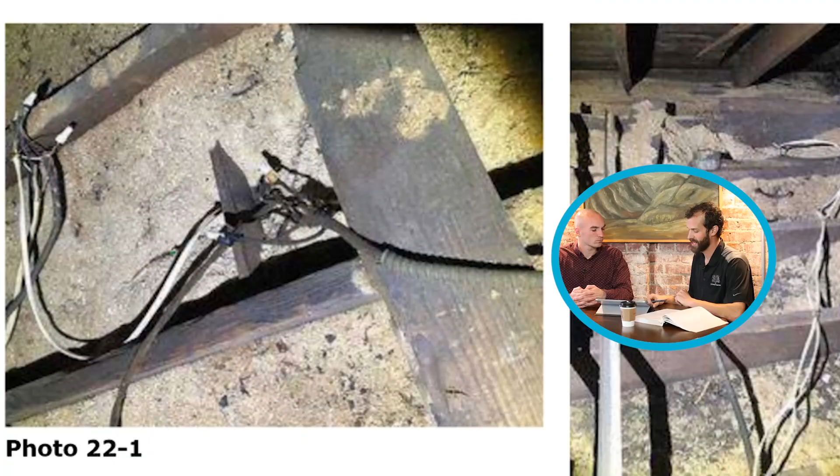Well, I'm impressed that you and Liz undertook tackling a project of this extent as new homeowners. I think it's fair to say 95% of people who had walked through that house would have run away terrified, given the heavy lift that was entailed in this project. So let's do our best to walk through photo by photo in a systematic fashion, looking at each of these violations and talking through the codes around them.

So photo number 22-1, we've got 2 open splices here in the attic. You'll see from this photo a couple things. One, the attic insulation is real minimal, so this is not going to be the final equation as far as the attic conditions at the end of this rehab project.

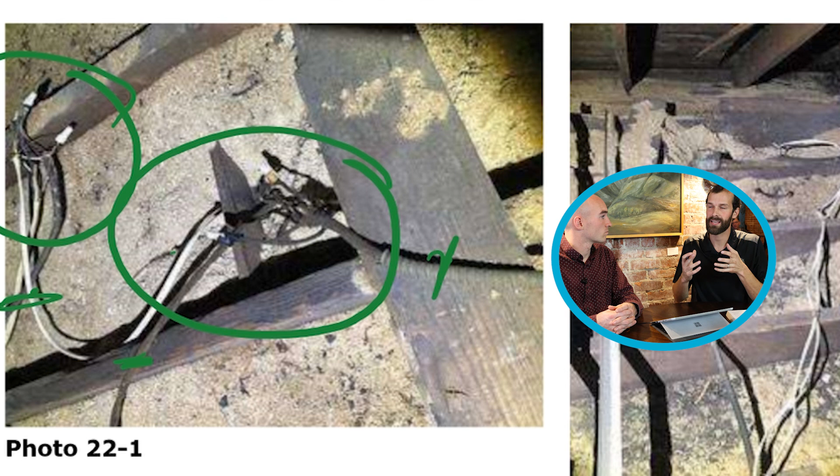But the junction boxes that are meant to contain and house these electrical connections are entirely absent. It's just a wire nut to wire nut connection. And in addition to that, there's no securement on the incoming wires in any way, shape, or form. So these junctions, really the safety concern here is manifold in this situation.

Safety concern number 1 is the junction is not properly contained or enclosed. So if there's a failure on these electrical junctions, that heat or fire incident is not going to be contained. It's going to be exposed to the nearest combustible framing members, wood framing members right here. That splice is literally resting on combustible material. So we've got an optimal situation for a major heat incident.

Second, those connections are not in any way protected from future attic insulation or from accidental incident. Obviously an attic is going to be traversed periodically for different types of service purposes and things of that nature.

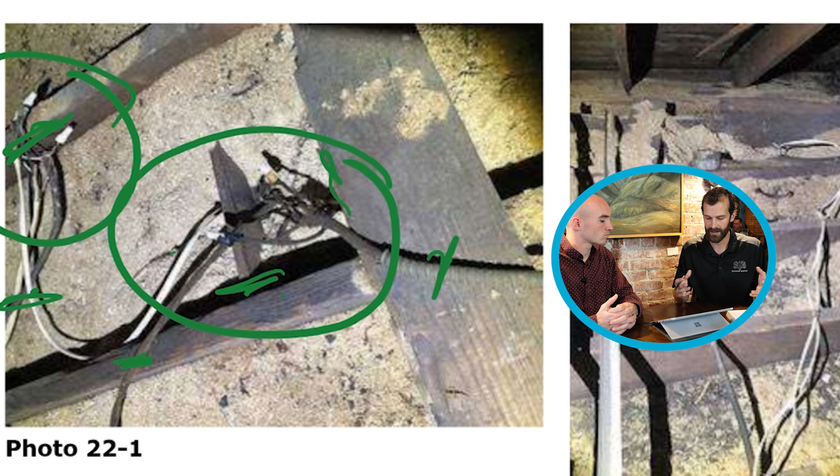And the third, from a personnel standpoint, personnel are not protected from the risk of shock hazard suitably. The interior conductors are exposed. The insulation on those conductors is lightweight, meant to be contained inside of some type of electrical enclosure. If one of those wire nuts comes off, there's no secondary protection, so the risk of shock to personnel is substantially increased.

And you said that BX wire is externally grounded, right? So is that the most dangerous in this scenario, or are certain wire types more dangerous than others? I know knob and tube's like a thing. The thing. And your house had plenty of knob and tube. Oh, it's not depicted in this photo here, but yeah, good point.

So wire types real quick, and the grounding and bonding and continuity, both mechanical and electrical, associated with them. This white conductor here is Romex, what you buy off the shelf today at a home supply or electrical supply store. This right here is early generation non-metallic cable, which we call 'snakeskin' affectionately. It almost looks like the skin of a snake, and the outer jacket will peel off and literally look like a snake shed its skin in the attic.

And then this one over here, this is BX cable. To your point, the outer jacket is the grounding path. So we have a grounded cable in our non-metallic cable, an ungrounded cable in our snakeskin, and a grounding path which is not being utilized in our BX cable. In this situation, a metallic junction box would be required in order to connect and ground, with a proper fitting, the jacket and the grounding conductor on the non-metallic cable.

So that we're now electrically and mechanically continuous as far as the ground path. Ground path is required to be continued through every junction box. It's actually pretty typical in an older home like yours, anything built from the late 1800s all the way through the 1940s, to find 4 types of wiring: BX, snakeskin, Romex, and knob and tube. So your house is pretty par for the course in that respect, and it was due for some major updates.

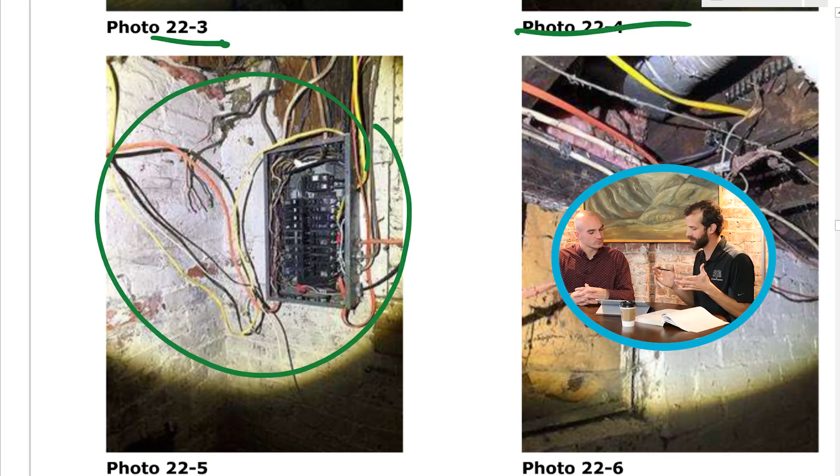Non-metallic wiring types like this Romex are required to be secured within every 4.5 feet and within 12 inches of every termination. Your house actually got hit with not just poor workmanship over a long period of time in a transitional neighborhood, but also a wiring theft.

At some point, someone broke into this house and stripped elements of both the electrical and plumbing system and looted the copper. There's been substantial efforts in the last 4 to 5 years to really crack down on scrapping copper. An electrical license or an HVAC license plus property addresses are required to prevent this type of looting to a property.

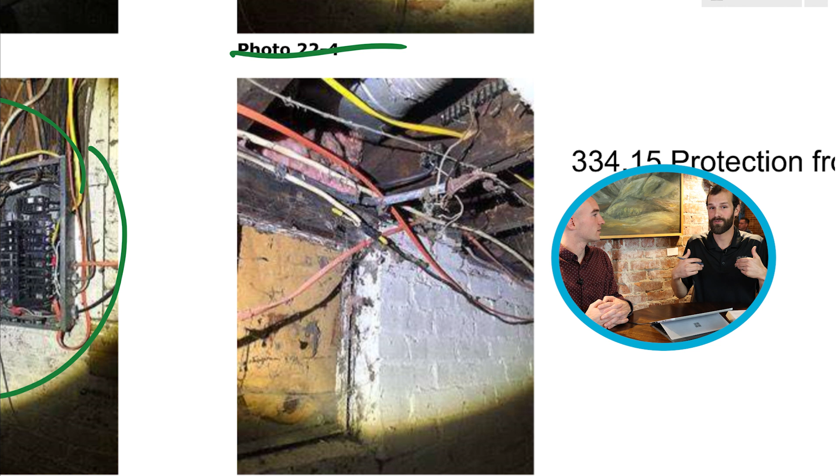So that's really dramatically decreased the number of even occupied dwellings that we respond to, where somebody goes on vacation or there's a tenant transition and the for rent sign goes out in the front yard, the house is unoccupied. And we're actually responding on a pretty regular basis to houses that have been stripped of their wiring in the basement.

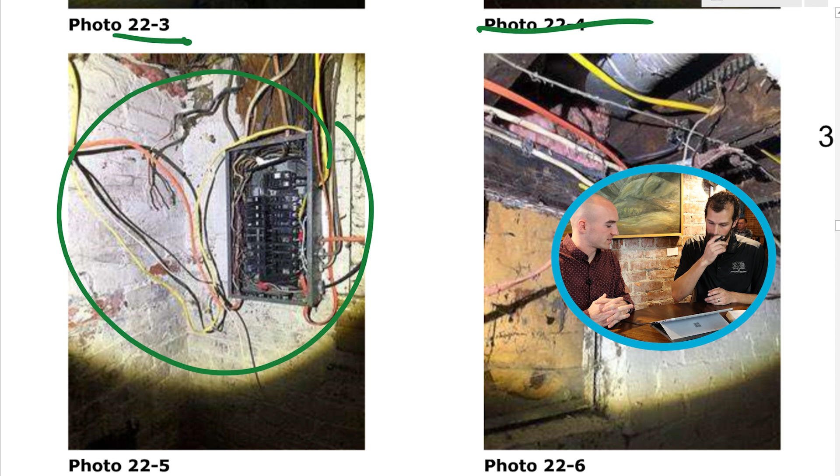Probably $50 to $150 of scrap copper and $3,000 to $4,000 worth of wiring repairs to make that house livable again. And just revisiting this, how do you see that? Is it because of the new Romex that you see mixed in there? Yeah, that's a good question. Or just cuts? That's a great question. That's actually going to be real evident in a later photo here.

More evidence of poor workmanship, wiring not being secured to and closely following the building finish and surface. This one right here, we had a small amount of wiring that was actually properly run through the joist cavity, drilled holes. Unfortunately, when less than 15 to 20% of the building wiring is in good shape like this, it is difficult to reuse because it's spliced, especially when you have floor plan changes. It's no longer going to the right destination. That outlet has now been relocated with a wall that's been removed, a kitchen that's been redesigned, relaid out.

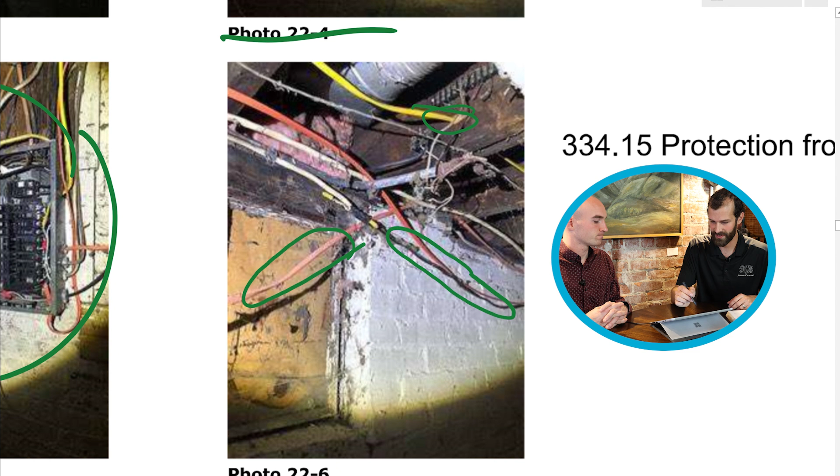So there really wasn't much usable wiring, even though there was some current wiring. So our collective decision was to go the direction of a whole house rewire, because there's very little salvageable, undamaged wiring in the house at all.

Got some more views here on the tragedy going on in the basement, wiring tragedy, and you'll see that the wiring here has been cut. Why all of it wasn't taken, no idea.

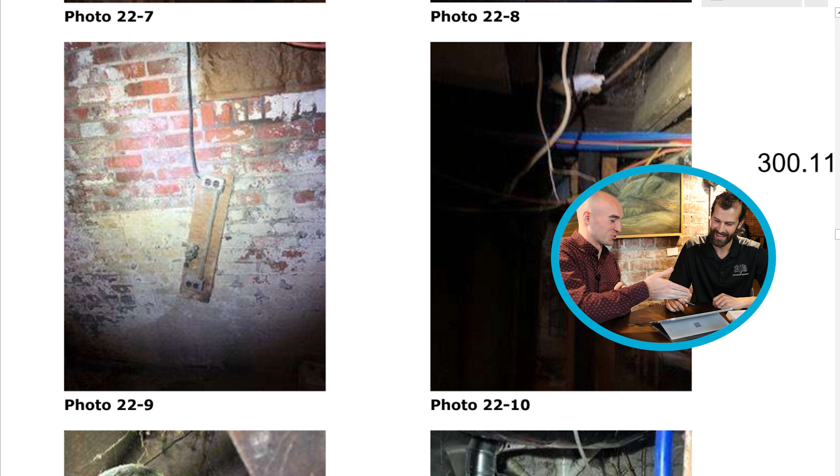This is a beauty right here. Yeah, it just looks wrong. So a couple things going on here. One, we don't have protection from physical damage. When the wiring drops down the basement wall, like usually in the overhead cavity, non-metallic exposed wiring is going to be permitted by most jurisdictions. But when it drops down the basement wall, it does need to be secured and supported.

Our typical approach would be to put that in a PVC conduit when it's on an exterior wall specifically. That PVC is going to weather a lot better on an exterior wall than electrical metallic tubing, for instance, which is going to have evidence of corrosion slowly over time.

So it's not secured, it's not protected. We are missing GFCI protection and wet location on the basement outlets. There's no contention about an unfinished basement being, by code definition and interpretation, a wet location. And so ground fault circuit interrupter protection would be required.

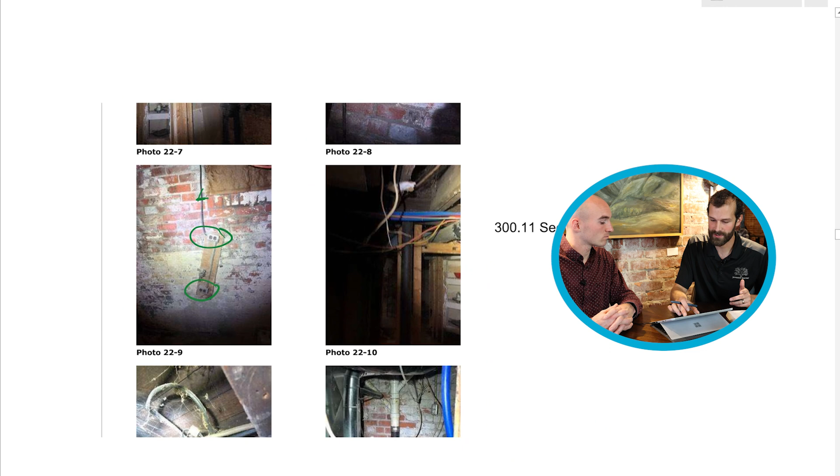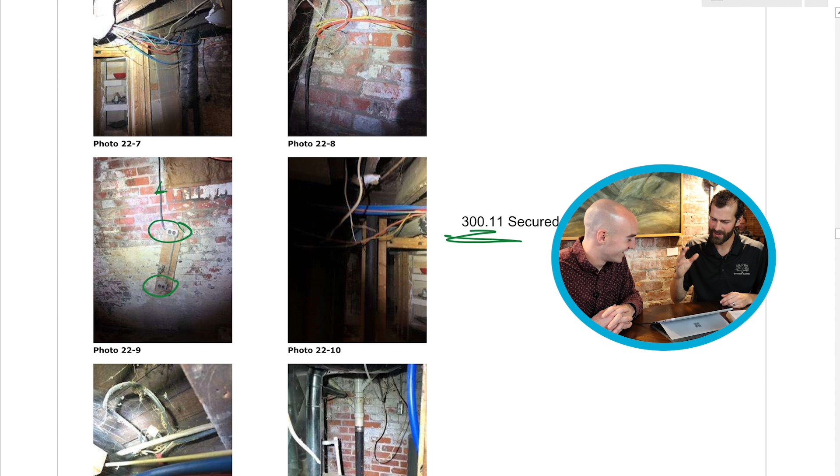And then also, receptacles are required to be secured in place, 300.11, secured in place, affixed, fastened rigidly and solidly to the building structure, and not to, you can't slap that onto a water heater or a furnace, it's got to be the structure of the building itself. And not to a random chunk of plywood that is hanging by the wiring.

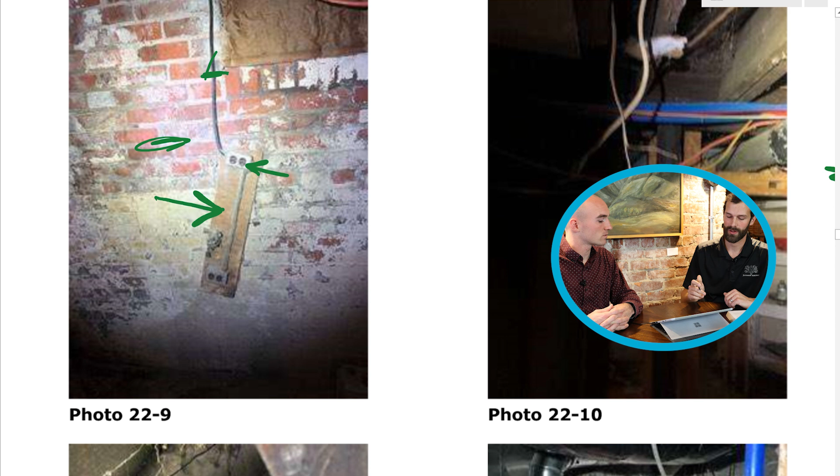Got it. Right, and this is one thing that inspectors will actually fairly routinely require, is some kind of vapor gap between ferrous metals, like we see here. This is a steel junction box, that's a ferrous metal, and a damp surface or wet surface. My contention with plywood is that it has an unsuitable lifespan for the installation that's present.

And so electrical boxes often will be equipped with bump outs, quarter inch bump outs. That creates an air gap on the back of the electrical box. So that's something to look for if you're planning an installation.

If you've got an electrical box like this, a steel handy box that's really got no weatherproofing capabilities, and it doesn't have those quarter inch bump outs, or an enameled surface, or a PVC coating, or something of that nature, it's not rated for your basement walls. It's going to corrode, and you're going to have a moisture condition inside of your electrical box. That's our lean towards PVC in that circumstance.

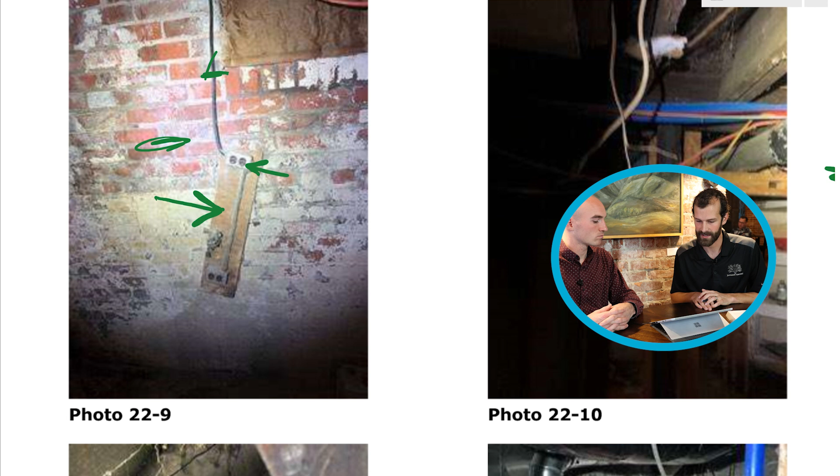More evidence of what's taking place here. All right, we've got a little beautiful knob and tube going on here, there it is. Gorgeous, more open splicing, beautiful.

All this other down here is PEX. We've got cold water lines, hot water lines. That's a 10-3 Romex cable traveling to, I think, what was the dryer location. Yeah, that's been rerouted as well.

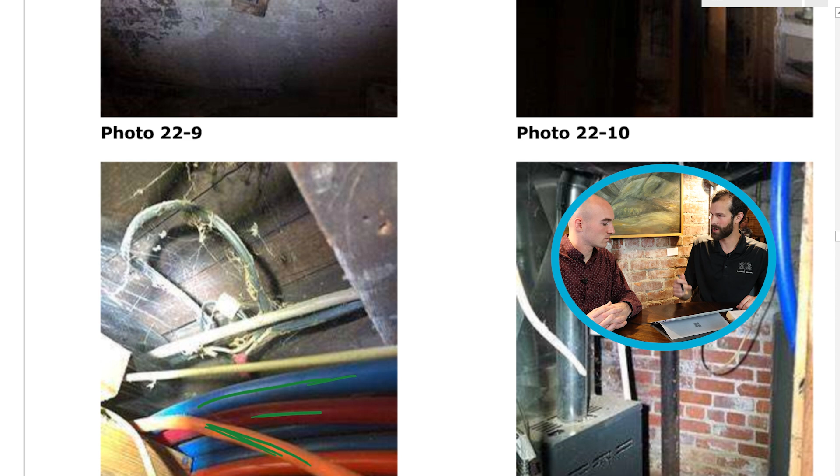You'll see a lack of GFCI protection. This one actually has been protected. That cable is in an EMT conduit, and that's, I believe, an interior brick wall, is that correct? Yep, so that would be one application where that interior wall really shouldn't see much moisture at all.

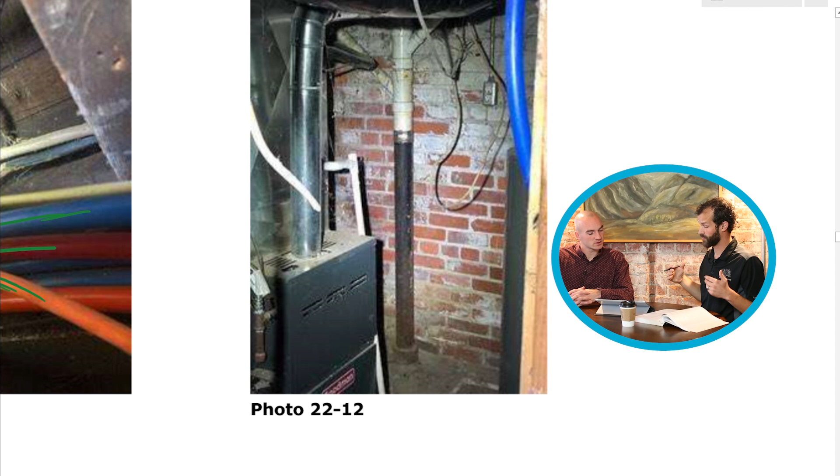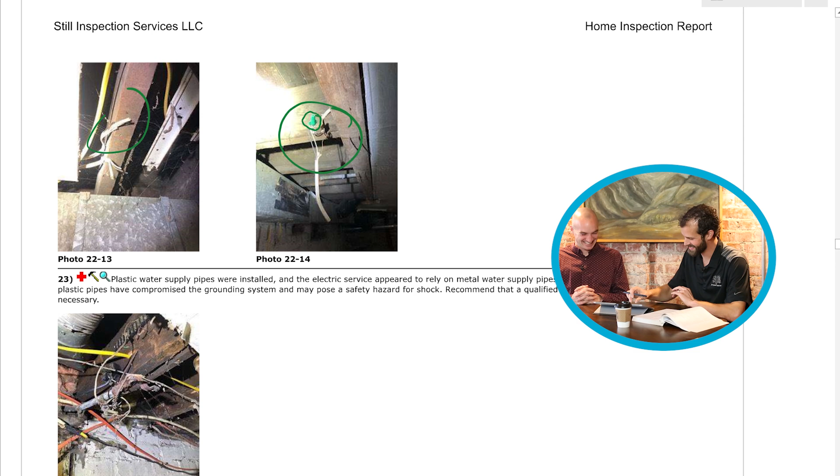So we've got more beauty shots here. Stripped wire. I love the fact in this photo that they've got a really nice green grounding wire added to continue the grounding path for this absolutely horrendous installation. It's hysterical.

And also, in previous videos, you've talked about water or gas lines being near anything. Ventilation, like those are vents there. They're metal. Does that need any consideration at all?

Yeah, at least two considerations. The first is that metal ducting presents sharp metal edges, and non-metallic wiring has to be run in a manner in which it's protected from damage and abrasion. It has to be installed with all considerations for protection to the physical jacket itself, and during installation thereafter, you want to make sure it's not at risk of harm.

And secondarily, wiring can be run around the ducting and there's no proximity limitation, but it cannot be run through the ducting. Sometimes, particularly in a wall cavity, the cavity is the duct way itself, and it's tempting to just cut right through there to take the shortest path. If there's a fire event at the house and the jacket is inside the airway system, the furnace is probably still going to be running and distributing toxic fumes throughout the entire house, creating a more hazardous situation.

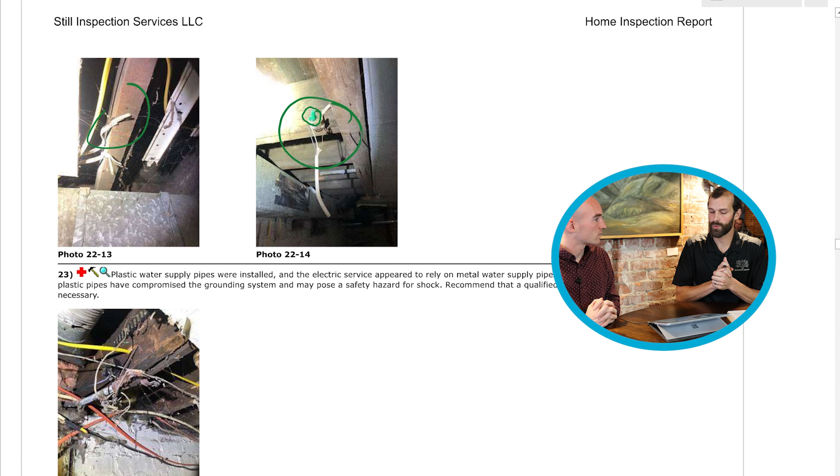So you said just when it's in flames or when it's hot? Like if a wire's touching the vent, is that a problem? No, the jacket's going to have sufficient rating for the temperature. It's only if it's actually failing, cooking, roasting.

Okay, all right, here we're into the main electrical panel. There's a bunch going on in here, this is busy. Photo number 1 here, 24-1. The code violation I'd like to illuminate is the double tapping of this breaker. We've got 2 hot or ungrounded conductors coming into one terminal.

And the question around that is the terminal—everything electrical has to be used according to the listing and labeling. What is listing? Listing is literally a list of products that have been tested and certified by a listing laboratory, like Underwriters Laboratories, most famous listing laboratory this side of the Suez Canal. UL, right? UL, okay, that's it.

You've seen the mark on everything you purchase, right? They're all over the place. So this breaker was not listed and tested to have 2 conductors coming into a terminal designed for 1 conductor. That creates a conflict, an inherent code conflict, and the reference there is 110.3(b). That's one of the most ubiquitous codes because it just means everything—everything has to be not only installed properly, but also used properly.

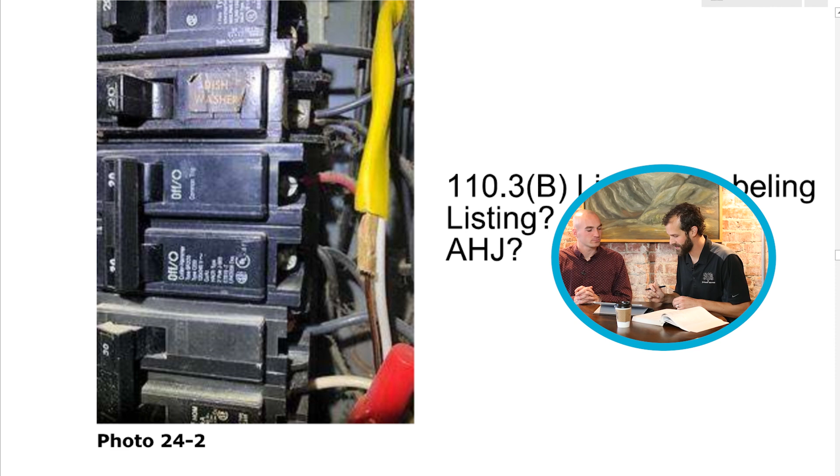That's what that is. So are there any breakers that are supposed to have double tapped wires? Yeah, those breakers do exist, but they're not these. In this photo we've got a smorgasbord of Siemens breakers, a dishwasher breaker of unknown brand probably not compatible with this, a Cutler Hammer, and I think a Square D Homeline at the bottom.

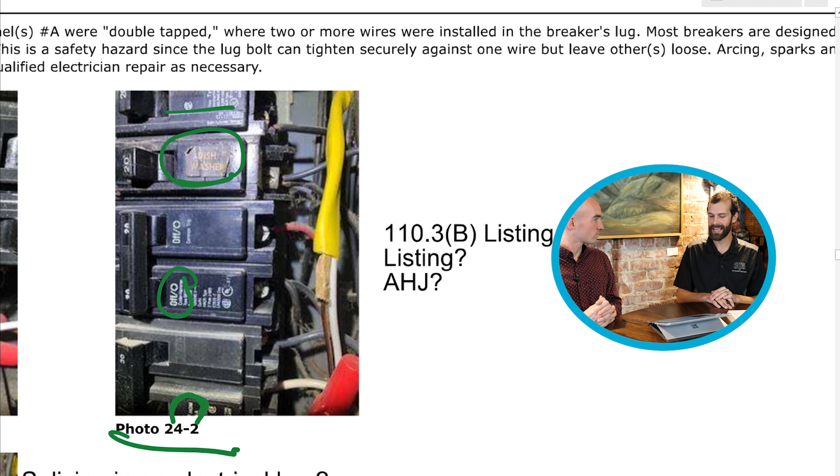And I guarantee you that this old breaker panel was not listed and labeled to be compatible with these 4 different breaker types. So we've got an inherent code violation there. It would take a little bit of research to prove it beyond the shadow of a doubt, but it's a 99% chance that's an existing issue.

All right, this one right here, this outer jacket inside of the box. I think it's a little bit difficult, this might be contentious with some of you electricians out there. I think it's a little bit difficult to argue that that's a code violation. The code does state there's a minimum when you've got an overall outer jacket on a multi-conductor cable like this. It's a 3-conductor cable. We've got a neutral, a ground, and I don't actually see where the hot is going.

When you've got a 3-conductor cable, minimum 1/4 inch of the outer jacket inside the clamp and the electrical box. That's so we're clamped on the outer jacket, and that provides a protective layer to the inner, more susceptible cables. But it's a little bit hard to argue, in my opinion, that an excessive amount of jacket is technically a code violation. I would wholeheartedly agree it's a violation of best practice, because that becomes really cumbersome. That outer jacket is not nearly as workable. It takes up more physical space in what's already a tight environment where you're looking for every inch you can find. So most definitely a violation of best practices.

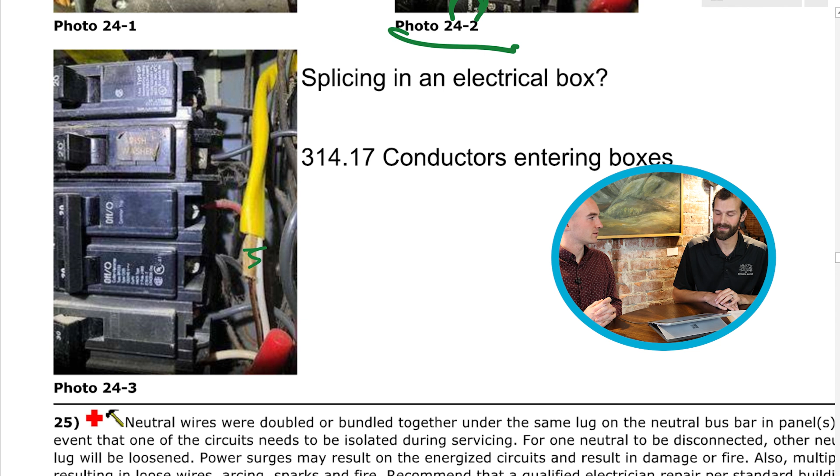Can I ask a nitpicky question there? That little paper within the jacket, is that flammable or no? I've noticed it before. It is waxed paper. Is it flammable? Maybe one of you can answer that question in the comments below. I'm gonna say it has some fire resistant properties, but help me out.

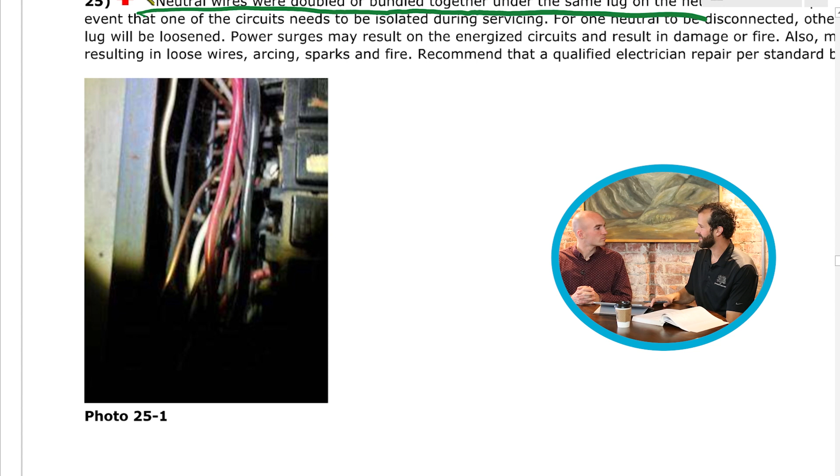All right, in this photo you really can't see it, but neutral wires were doubled or bundled together under the same lug. It comes back to 110.3B. Those terminals on the neutral bar were not rated for more than one neutral conductor.

There's a lot of sensibility in this for those of us who can be tempted from time to time to take a shortcut. What can happen is, particularly, let's say you've got a situation where you've got a number 14 stranded neutral, lots of very small, fine conductors, and you've got a number 10 gauge solid. I'm straw manning the argument a little bit here. But they're both copper, they're both neutrals, but very different proportions. When that terminal tightens down on 2 dissimilar conductors, you bet your bottom dollar it's going to snug up pretty well to that number 10 gauge neutral conductor, and that 14 gauge, a couple of those strands might be grabbed, might be holding on, but you're not going to have a solid, full capacity electrical connection.

So what can take place is you can have heating right there at that point where that smaller neutral conductor is really not getting its full capacity. If that circuit's lightly loaded, the issue's probably never going to become evident. But if that circuit's carrying a little bit more, a vacuum cleaner, a space heater, a dishwasher, a microwave, a number of different high draw appliances, then that draw is gonna rat out the weakness, and you're gonna have a loose neutral issue. And we all know what loose neutrals can do. You can literally have arc flash, dramatic electrical failure involving smoke and fire. A loose neutral is about the worst situation you can have from an electrical perspective.

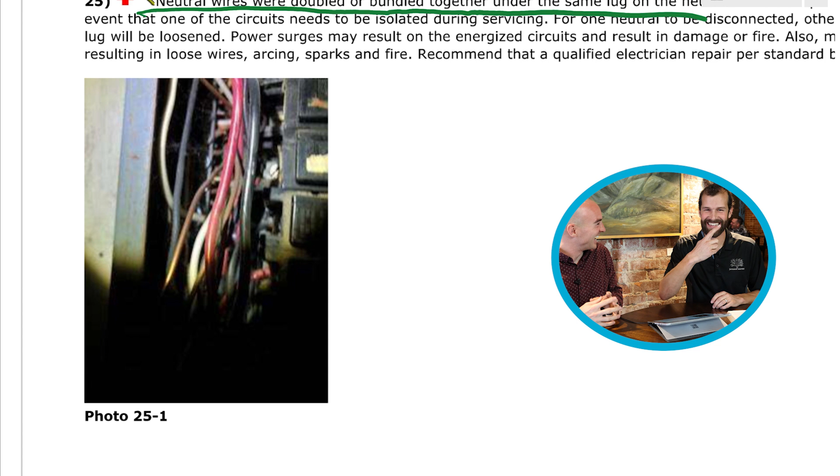So a couple thoughts for you here. One, the manufacturers typically will recommend that a breaker gets exercised - how many of us actually do this - to the off position and back on again once every 6 months. So every time you go to the dentist, exercise your breakers. Once every 6 months to make sure that internal mechanism is staying pliable.

Because of the exterior condition of this breaker and the different evidences we're seeing of exposure to moisture, that was one of the big things in this report. Lots of moisture evidence in the basement, including mold. And I would be incredibly suspect that

that breaker would perform suitably under a fault condition because of the high moisture condition. So at the very least, exercise your breakers. And in this case, we replaced the panel and all the breakers and just freshened everything up in a big way.

I'd never heard that, every 6 months. That's an easy rule of thumb. Every time you go to the dentist, exercise your breakers. That's your Google Calendar reminder.

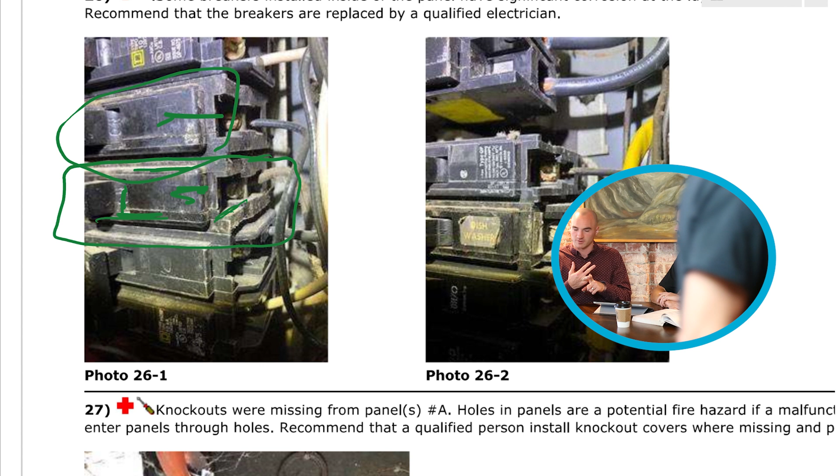could have been playing a role. Now we've got a dehumidifier running down there. We've gotten those floor drains opened up, and the next project of many will be kind of sealing up the walls, getting some probably insulation foam in there, and yeah, so all those things will be improving here, but we've replaced all these components. That's great as well.

The electrical system really is going to have the best life and provide the best service if the moisture content is between 30 and 50% humidity, and it's really consistently climatized. That's going to serve the breakers well.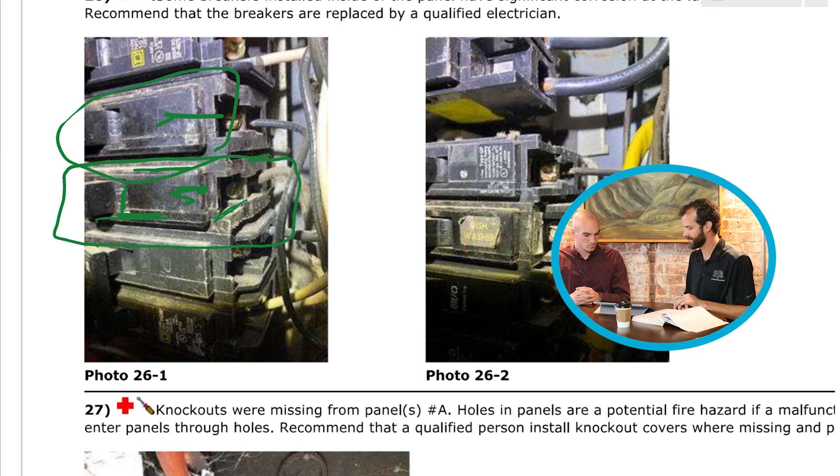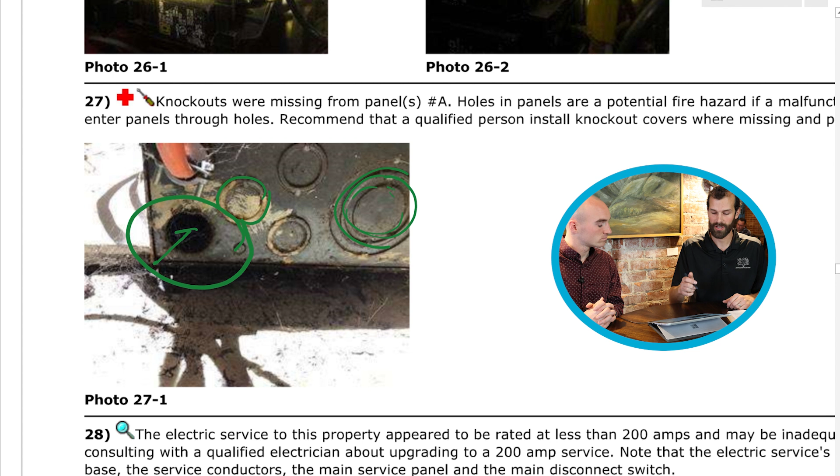All right, here we've got the bottom of the electrical panel and an open knockout, so everything's required to be fully sealed. Knockout closures for all different sizes, whether it's this 1/2 inch, 3/4 inch, and then these concentric knockouts here, 1 1/4 inch, 1.5, 2 inch, 2.5 inch. Knockout closures are designed, sold at every local hardware store for that purpose, so that it gets sealed back up.

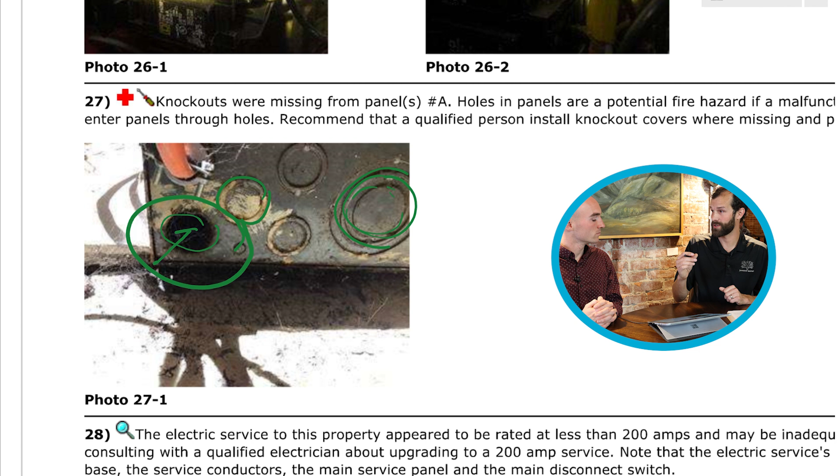It's going to prevent the infiltration of mice, rats, bugs. It's going to prevent accidental entry of something into the panel that creates a shock hazard for personnel. It's also going to continue and carry the fire rating of that enclosure. And so the knockout closure is required to be of the same material, thickness, and type as the panel itself. So you'll see that those closures are designed a little bit beefy, and we'll close that up properly.

Now here's an interesting debate right here. The electrical service to this property appears to be rated at less than 200 amps. Yes, indeed, 100 amp rated. You can tell by wire size, pipe size, meter size, that is all sized and rated to 100 amps.

A thought process around that real quick on a couple different fronts. One, from a cost equation, the cost of upgrading the electrical panel only from a dated 100 amp with evidence of corrosion to a brand new 100 amp panel, sitting in the range of anywhere from $500 to $1,500, depending on a lot of different factors.

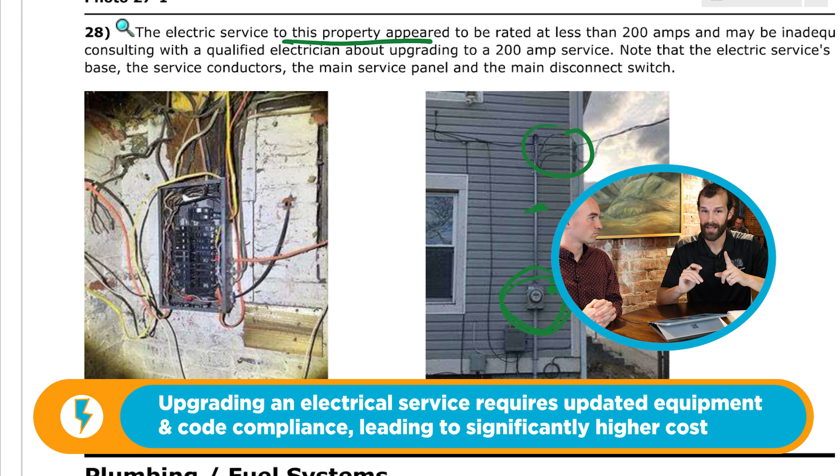The cost of upgrading the entire electrical service from 100 to 200 amps does require, and a lot of people get this confused - I hear homeowners say all the time, hey, my inspector said I've got a 100 amp meter, what would it take to get a 200 amp meter? That's actually not the question. You need a 200 amp service.

That means everything from the point of utility connection all the way through the distribution system and into the main panel, absolutely everything is required to be 200 amp rated - the size of the pipe, the size of the wire, the size of the meter. You can't just swap out the meter itself. In fact, the utility company will probably utilize the same meter. It's the whole service. So the cost of a service upgrade in full, you're looking at typically between $1,500 and $3,500. So tack on another $2,000 to that project cost.

And in this case, we've got a couple unique situations in that this gets even more involved and runs that price up, because this service is grandfathered in for the time being while it remains in its present location. But when it's upgraded, it's got to comply with the present utility standard, which is 3 feet, in the case of our utility, 3 feet to edges and corners, 3 feet to operable portions of windows.

This is not a 6-foot wall space. So this whole electrical service has to be relocated if it's upgraded. And now we're in that $3,000 to $3,500 range because we're relocating this wiring and extending its length to a totally other part of the house. And really, in your situation, Tim, that was the ideal location for that service.

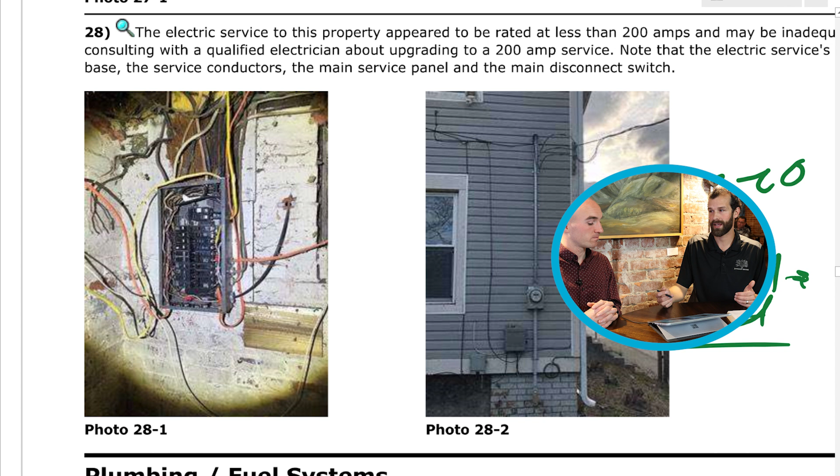Well, in your case, because you've got a detached garage, you can actually get a utility drop - separate power to the garage for the purpose of electric vehicle charging alone - and mitigate putting any of that capacity on your main electrical service. So let's say in 5 to 10 years, you and your wife, maybe less, are driving all electric. You can drop a 125 amp electrical service to the garage. You can charge 2 Teslas at the full rate without exceeding the parameters of that electrical service, and mitigate putting any of that load on the house, avoiding that expense and upgrade at that time. So there's more than one way to skin this cat.

And at this point, that's a future problem. But at least it's not a code issue, and the house is properly serviced. Super.

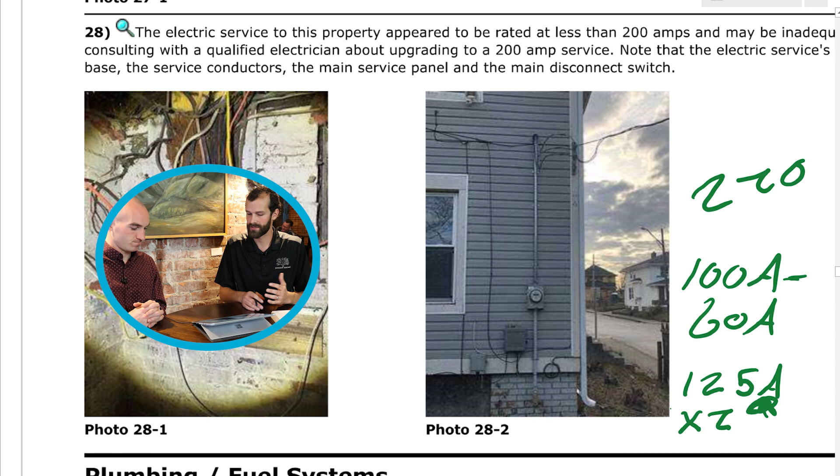Plumbing and fuel systems, not our problem.

The clamping system that you referred to here is interesting, and grounding and bonding is the single most complicated, even above and beyond service calculations, the most complicated and debated and misunderstood code article of the National Electrical Code.

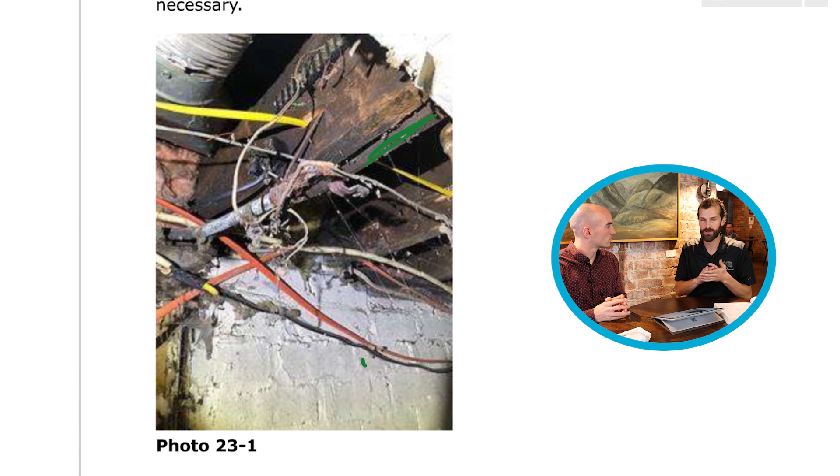It's intended, very intentionally and most importantly, to provide a safe grounding and bonding path from the gas piping system and any metallic domestic piping system, whether gas or water. I don't know what else there might be, if it would be a central vacuum system, which is typically PVC, but maybe there's some metallic systems out there. It's important that every domestic piping system is bonded to the electrical ground so that if it were to become energized, it will safely dissipate that current to the electrical grounding system. So it's not energizing the piping system, it's dissipating fault current.

Let me tell you a quick story, a true story. One of our customers, a good long-standing customer, his nephew, when he was about 8 years old, was with a group of friends, and he knelt down on the ground, one knee to the ground. That ended up being the grounding path in this unfortunate circumstance. One knee to the ground, one hand on the metal hose bib, just an old-fashioned metallic everyday hose bib. Because that metallic piping system was not bonded to the electrical system, it actually was energized with some neutral current flowing through there. And when that 8-year-old completed the circuit to ground, hand through the heart to earth, that current exited his knee.

He actually did not die in this case from electrical shock. He passed away from positional asphyxiation. He was caught by the current, frozen in place, could not move. And his friends were all standing there watching, as the story goes, and panicking, knowing that something's terribly wrong. They ran and got their parents and came back. By the time they got back, the child had passed away because he was fixed in place and literally was asphyxiated by his inability to move and free himself from that current.

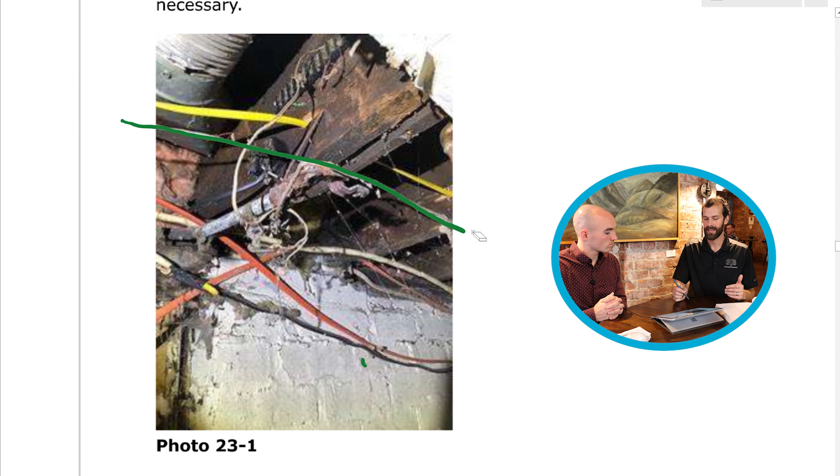One of the things electrical contractors will typically exclude from their scope of work is low voltage. Low voltage is anything 50 volts or below. You can get a little sting off like 24 or 48 volts, it's not going to kill you, but this white Cat 5 cable running through the picture is probably not included in the scope of work. It's a slightly different skill set. A lot of electricians possess it, some don't, but there's a different thought process to how that cable's run, a different cable type, and different tooling required to make those terminations.

As a homeowner, that's non-hazardous as long as you've properly identified it as a low voltage system. You can cut out those old cables and route new ones. Usually those kinds of things turn over with occupancy, because now your TV's in a new place, you need the cables in a new place, your workstation, your office, your desk, all those things, which are typically wirelessly connected at this point, become dated pretty quickly.

That's good for me to know. I haven't taken them out yet, but we have maybe one or two streaming services, no cable. We've got internet, but I know very well where that fiber cable is running. I know this one is not used by us at all, so it may come out because it's kind of a mess, hanging really low, in the way.

Yeah, you can take your pliers and just cut it out, again as long as you're certain it's 50 volts or below. Yes, yes, yes.

Let's talk about a couple things that distinguish, in my opinion, home inspectors. We say all the time to frustrated homeowners who just purchased a house and now face substantial repairs they did not anticipate: they spent $500 on a professional home inspection, and at that point we've come in because a little bit of knob and tube was detected in the attic, and they said, let's go ahead with the transaction anyway. They purchased the home, and we come in and present them with a $12,000 estimate to get rid of that little bit of knob and tube. That happens frequently in some of these older parts of town we work in.

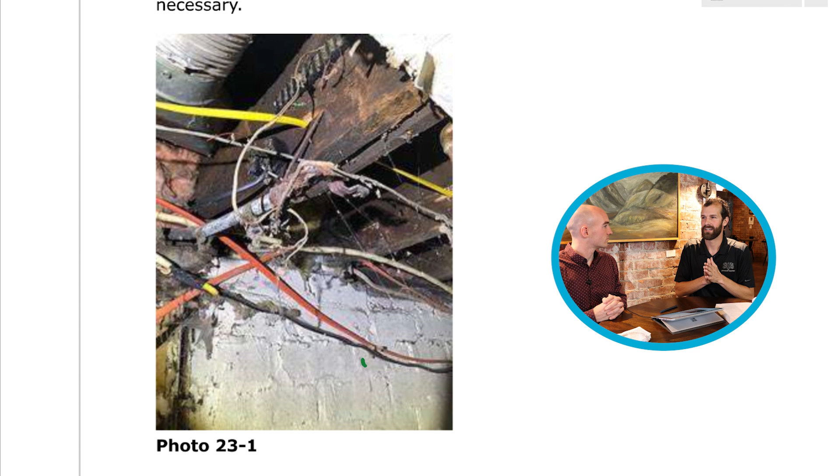One of the things I'm looking for in my inspector is I want to be present when the inspection's taking place, and I want to see him physically get in the crawl spaces and crawl around, get in the attic and walk around. A lot of inspectors unfortunately will kind of pop their head in, shine a light, look around, and that's it. You're not going to get the depth of rigor you're looking for out of 50% of the inspectors out there, so that's always a question I'm asking. And like you said, with the knob and tube, it's generally in the hardest to reach places. So it pays. It pays.

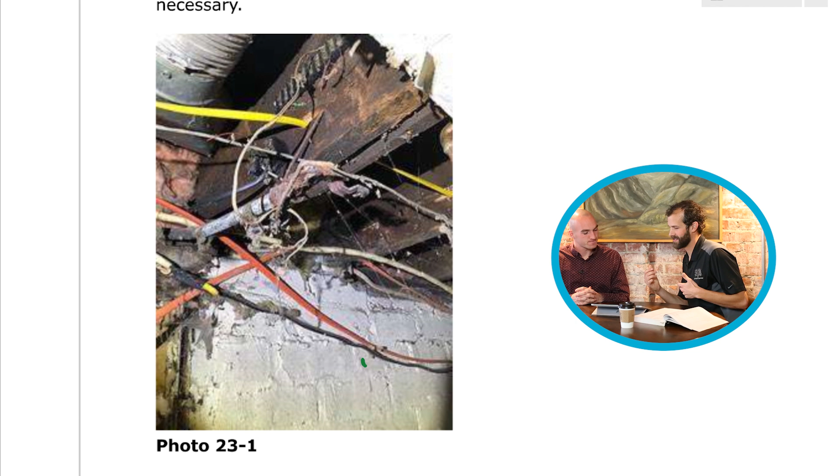What else? How else are inspectors? Do we cover the technical? Do we need to? Yeah.

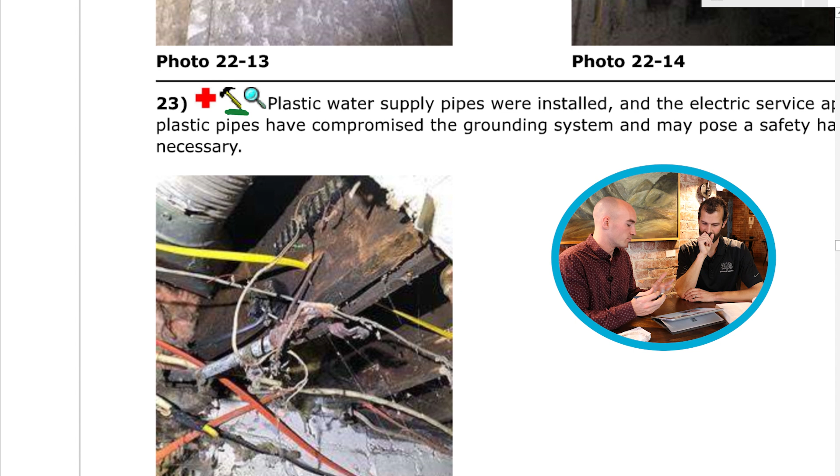What about on paper? Generally inspectors have these kinds of markings. They vary like crazy between different inspectors, but it's either a necessary, life-saving, structural, important thing, or it's something optional to look into. One thing to note here is the symbology utilized by the inspector. In the table of contents, he calls out what each one represents. This red cross means a major safety hazard. This is repair or replace, this little hammer here, and that's an item to monitor or evaluate. So it gives a scale as to the significance and urgency of the situation present.

I would say typically home inspectors do a pretty good job, particularly in an older home. A lot of deals fall through because homeowners who've never lived in an older home aren't familiar with or expecting to get 40, 50, 60 items on an inspection report, and they get scared away and the deal falls through. So being able to scale the sense of importance and urgency, I think is a really good tool that home inspectors are utilizing well. I'm proud of them for that.

That was kind of a thing in our situation, coming from a new built home, but my wife being in real estate was a nice, controlling, leveling factor for me when we got this document, some 40 pages of pictures and comments and the varying scales of importance. She kind of said, yeah, seems about right. That's it. And we made sure to get a price on the home that would allow us to do the repairs we needed to, and then maybe some more if that was in our mindset, and it worked out great for us.